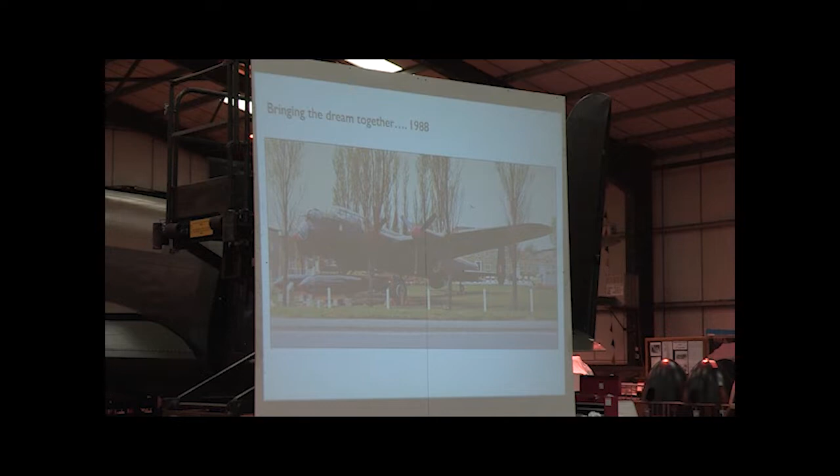So this is the Lancaster stood at RAF Scampton, 1988. We were actually offered the Lancaster in 1982 - Lord Lilford rang up Fred and said, it's about time I sold you that Lancaster. So they managed to agree a price. Fred went to see the bank manager - I'm sure the bank manager rolled his eyes. They managed to buy the aircraft, but they had to arrange moving it here to RAF East Kirkby as was.

They put the hangar up and brought the Lancaster here. It actually moved here in 1987, 1988, early 1988. The aircraft itself hadn't really been in a hangar until it came here, so it had been stood outside for the majority of its life.

We were quite fortunate in that before the RAF put the aircraft out on the gate at RAF Scampton, they did quite a major overhaul of her. They did a complete paint strip, took her apart, inhibited her, put her back together again, painted her and put her out on the gate. They used a reddy brown spray that we refer to as oxblood, which is a very strong preservative - we'll come back to that a little bit later on.

So the aircraft stood there at RAF Scampton. I'm sure a lot of you will have seen it if you drove past. At that point, the RAF didn't actually want Fred and Harold to move the aircraft and bring it here to East Kirkby, so they made various offers of how they would keep it at RAF Scampton and what they would do to her. But Fred and Harold had it set that they were going to bring her here.

On the balcony of the control tower, they stood there one day and said, if we can get that Lancaster here, there'll be nothing else like it in the world. And I think they were right - I don't think there is really anything else like the aviation centre here. It's very unique seeing an original wartime Lancaster on the original wartime airfield where they served.

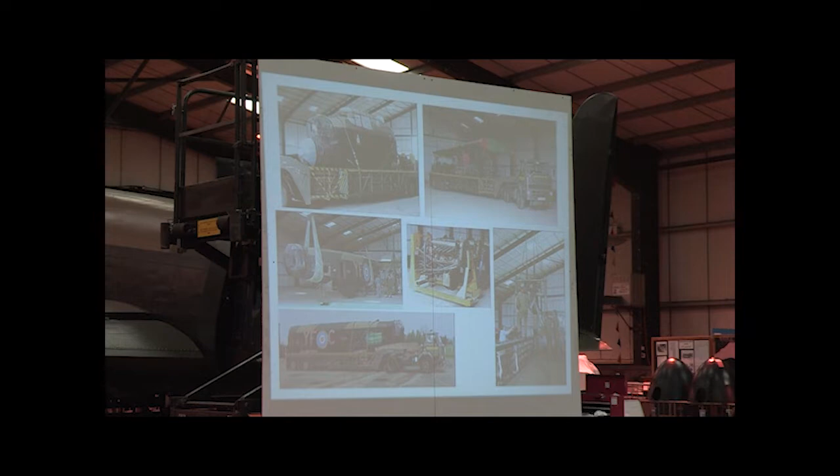So actually moving the aircraft, we spoke to the RAF and they were very willing to help us move the aircraft. They actually sent 11 men to take the aircraft apart. The group of men were called Crash and Smash - it's actually a part of the RAF that goes over and takes apart wrecked aircraft and rescues them, bringing them back to RAF stations. I'm not sure Crash and Smash is the official term, I think it's just the nickname they were given. They weren't too bad with this aircraft though, they were quite kind in the way they took it apart.

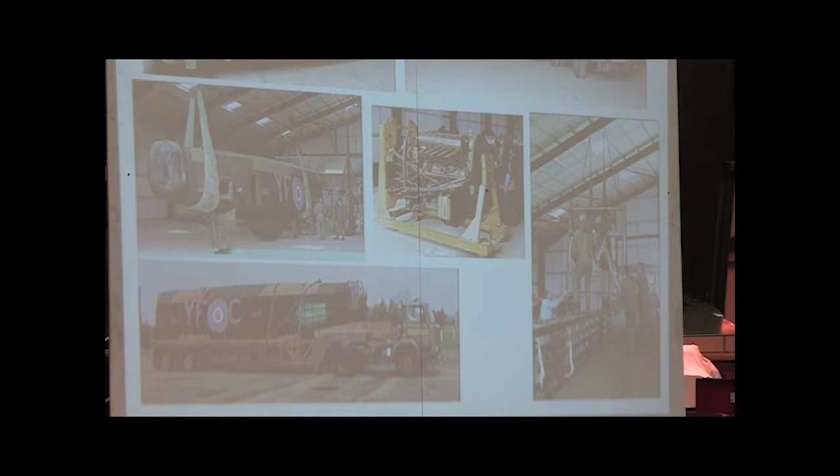It actually took 7 Queen Mary loads - this is a Queen Mary, the trailer itself - to bring her here to East Kirkby. It took 11 men 14 weeks to take her apart, bring her here, and put her back together again.

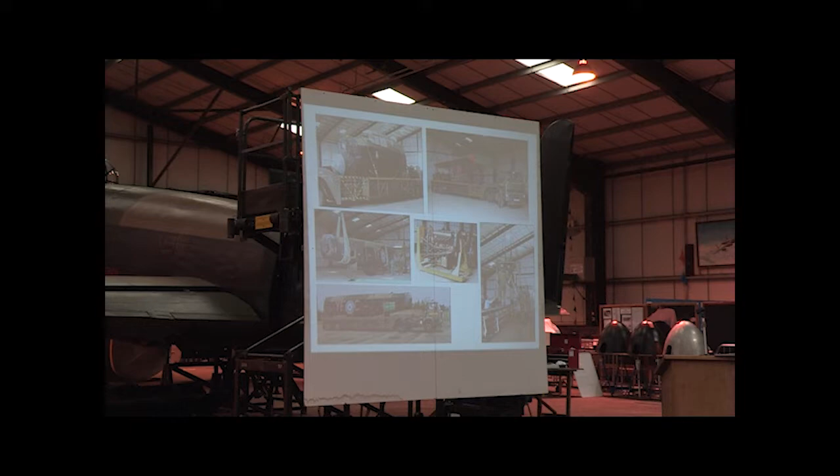So here she is, the majority of her brought into the hangar. If you look at this photo at the bottom, this is on that half of the hangar base. When we originally put the hangar up in the 80s, we only put half of it up - where you can see the double stanchion, we only had the first half, which was sufficient to keep the aircraft in. It was only in about 2000 when we put the other half of the hangar up.

So she was brought over by the RAF and put back together again. This is her in the hangar - you can see she's in her major sections, as the Lancaster is sectional. She basically unbolts and then bolts back together again, and that was originally from production. They had many production sites around the country where different sections of the aircraft were built, then brought together on trailers, assembled, and then flown off to the airfield where they would be sited.

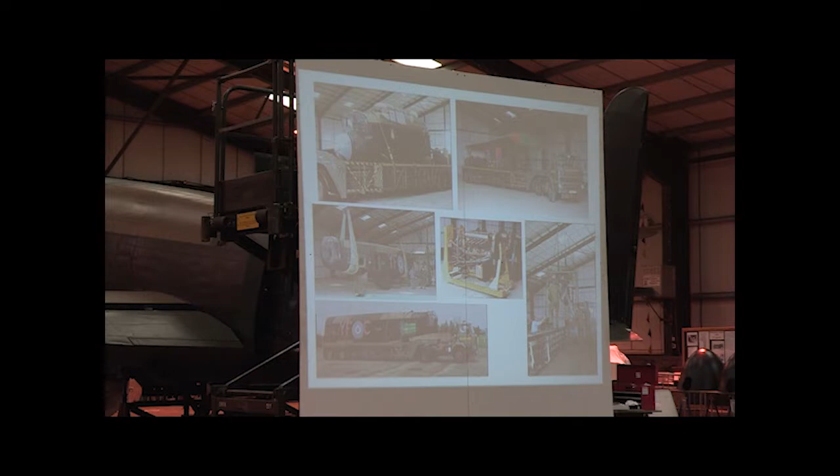Another photo of the aircraft coming together - you can see she's being craned together and bolted together, not in a too dissimilar configuration to how she is now.

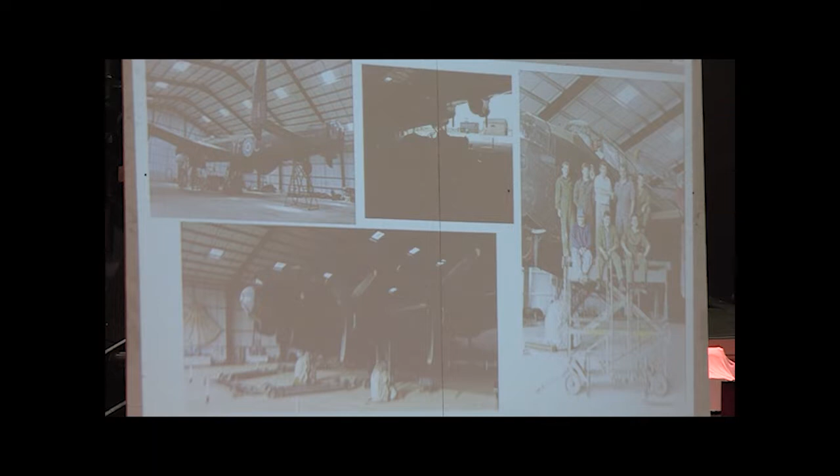Then the aircraft was finally completed, and we see here some of the crew members who completed the aircraft, and a gentleman called Keith Coldren, who at that time was looking after the site for us, while Fred and Harold looked after the poultry.

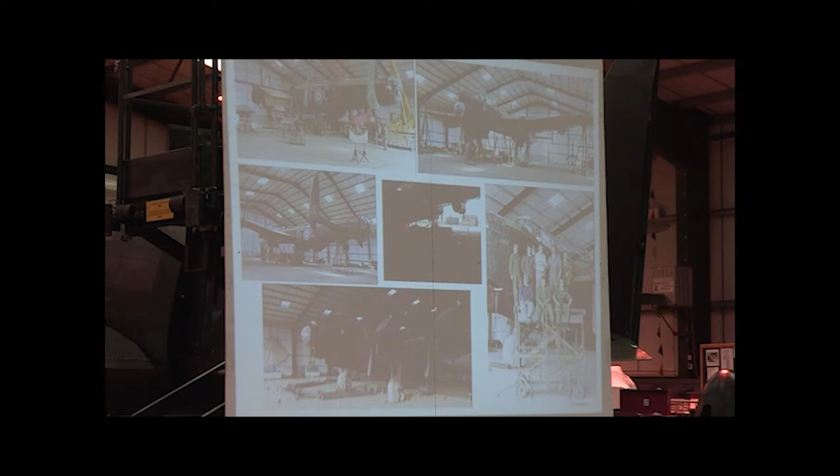At this point, the original plan was we were just going to keep the aircraft in the hangar and come have a look at it when we wanted, as you do. So we had put the hangar up, brought the aircraft in, and thought high days and holidays, if anybody came round to see the family, we could bring them over and let them have a look at the Lancaster.

And really take it in - but people said, you can't do that, you can't just lock the aircraft away. You've got to let people see it, because people have got to experience it and appreciate it for what it is.

So it was decided then that yes, we'd open it up to the public, to come and have a look. We didn't know how that was going to go, of course - didn't know if anybody would actually come and look at it. It was quite a major step to invest all this money in purchasing the aircraft, bringing it here, putting it in the hangar, putting the hangar up, and then deciding to open it up to the public to see if anybody actually wanted to come and have a look.

Fred had quite a few comments about this operation, spending all this money, bringing it here, investing in this work. The bank manager said to him, well, you've done it, Fred, and you've still got your health. And somebody else said to him, well, you've done it, Fred, and you've still got your wife, which they were more surprised about.

During the war, East Kirkby was one of over 40 Bomber Command air bases in Lincolnshire. The Panton brothers preserved the aerodrome as a home for their prized possession, a 1945 Avro Lancaster.

Well, we did live here as lads during the war, during the blackout, of course, and we can remember the Lancasters taking off and going on bombing raids and coming back early mornings. It's always a strange feeling to me to come out the house when it was pitch black and see the runway with a flare path lit up. That's the relevance of this Lancaster being here today, I suppose.

We feel so proud of those men, what they were doing 50 years ago, because we saw it with our own eyes. And as I keep repeating myself, you cannot speak highly enough of those chaps, because they would have gone for those bombing raids even if they knew they weren't going to come back. In fact, half of the young men in Bomber Command didn't come back from operations.

Fred and Harold's brother, Chris, was amongst them. If it wasn't for my brother Chris, none of this would have happened today. He got lost on the worst raid during the war, the Nuremberg raid on the 30th and 31st of March 1944. It was his last operation. When we look at this aircraft, we think of someone. That's what it's all about.

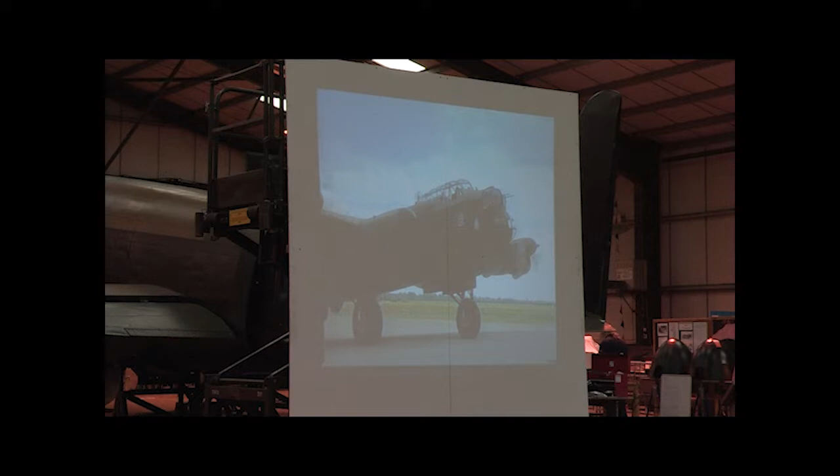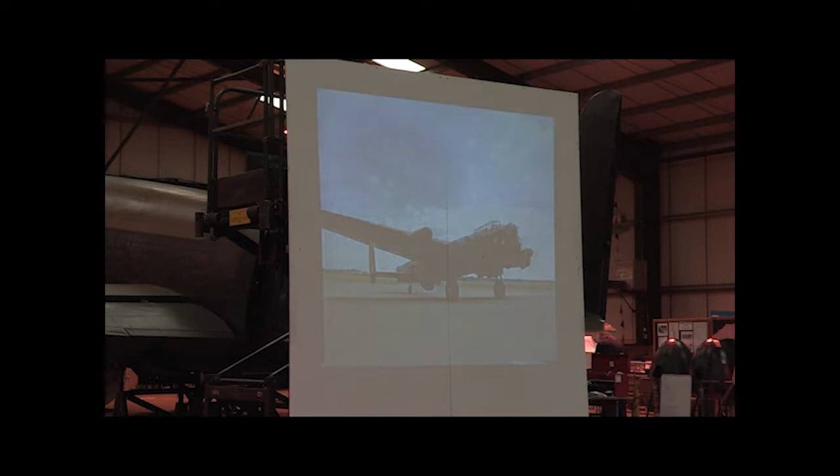So here we have it, the aircraft completed. Fred and Harold sat on the David Brown tractor and just towed her out of the hangar. You'll see on the side of the aircraft we've had LEC painted on, that's the 630 Squadron who were based here at East Kirkby during the Second World War. The opposite side had DXC, which was the 57 Squadron also based here.

So obviously the aircraft was complete, stood out in the hangar here at East Kirkby. Fred and Harold seem to have had many questions posed to them over the time, and they seem to come in sections. The first question was, are you going to let people come see it? The second question was, are you going to get it running? And the third question was, when are you going to fly it? So we're at the second question point this time, are you going to get it running?

So Fred and Harold toyed with the idea. They thought, well, we could give it a bit of a go, I guess, see if the engines will run. At this point, the Lancaster hadn't been running for 23 years. She had been well preserved, stood at RAF Scampton, and the engines had all been sprayed and inhibited with this oxblood that I've spoken about.

So quite fortuitously, not too long after this time, there was a gentleman called Ian Hickling who came and saw Fred and said, do you want me to get the Lancaster running for you? Ian at that time was late 20s, early 30s, and as you can imagine, Fred said, well, I don't think you can do it. But Fred rang up Barry Sears, who was the warrant officer of the Battle of Britain Memorial Flight at RAF Coningsby, because Ian claimed he'd worked for 8 years on the BBMF.

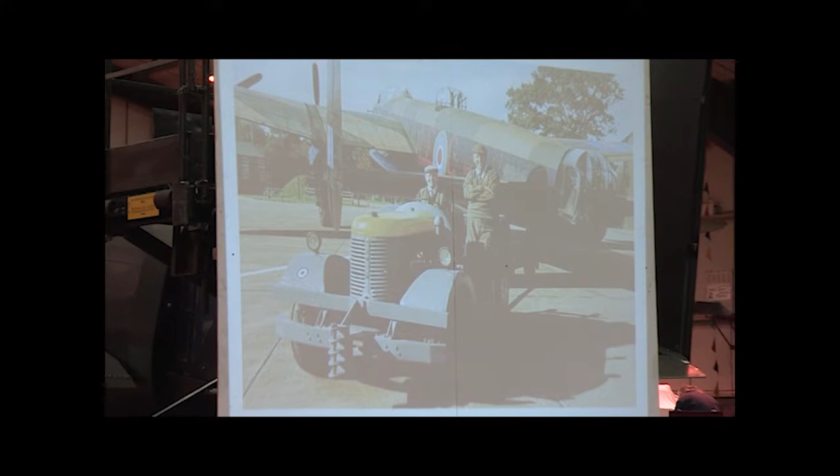They just used the inboards to start. Once they'd done their taxi test, they thought, well, this is viable, we could actually taxi the Lancaster, and they worked on getting the outboards running as well, the two outboard engines. All the engines were really running within about a 6-month period, so it's quite a short period to getting the aircraft live again.

So we'll move on to the next little video that I have.

Responsibility for taxiing such a unique aircraft had to be undertaken by an experienced Lancaster pilot. There was only one man for the job.

The idea of actually operating two Lancasters is obviously fantastic. I feel very honoured to be able to operate one, but to actually operate two and within such a short distance. This one, I would say, is even more important to me in that it's such a family connection, in that my father used to operate and fly Lancasters from here 50 years ago, and to be able to do the same with another Lancaster at the same airfield, just 50 years later, is a thing that nobody would ever have dreamt of, I imagine.

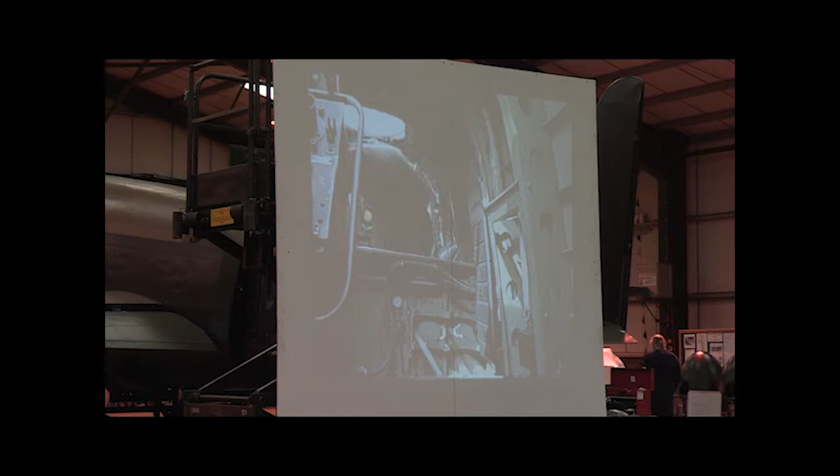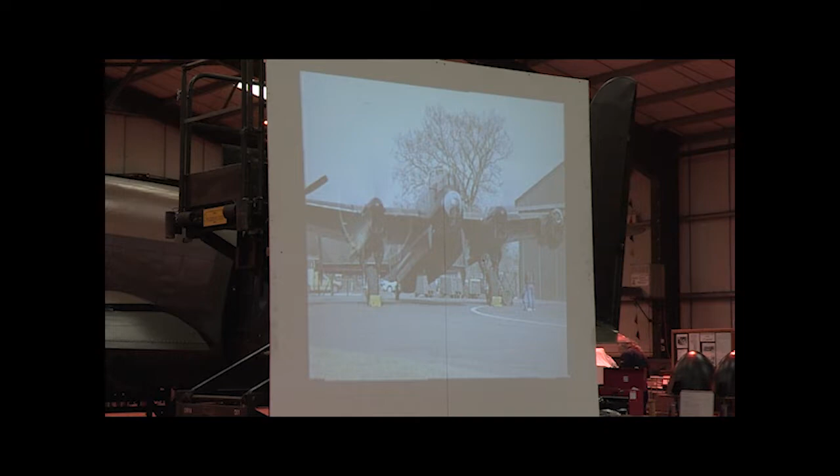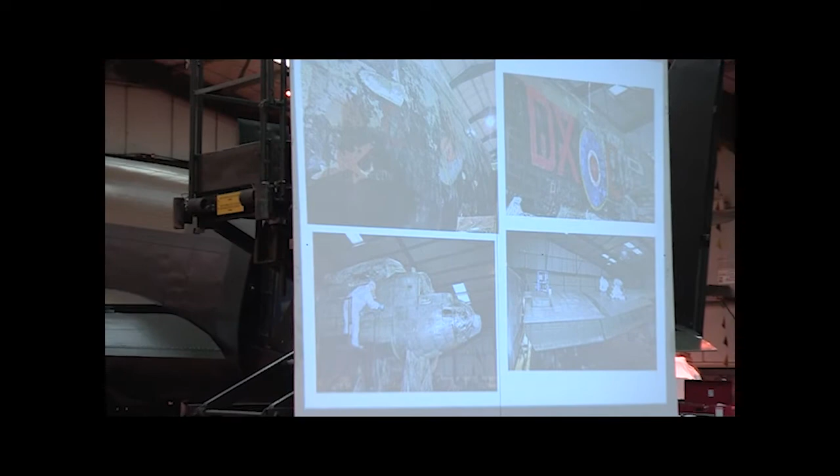It's quite a long story, this one, but we got some quotes for paint stripping the aircraft and repainting her, which gives us a chance to actually survey the aircraft - the skins, all the rivets and things like that. We got a quote and it was coming in at £125,000 to paint strip and repaint the aircraft.

We were quite fortunate in the fact that we have a gold member of the centre called Armand Lloyd. Armand works in a business down in London, but he's also interested, obviously, in Lancasters, and he wanted to try and help us in any way he can.

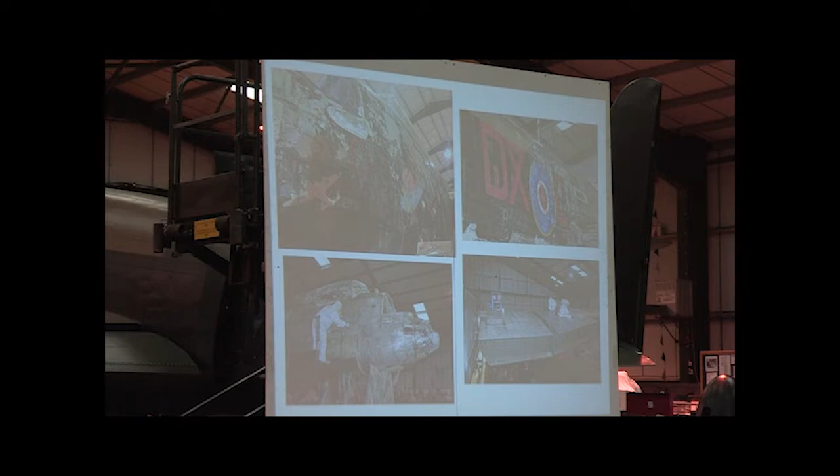He saw on eBay there was a large box of gauges and instruments for a Lancaster that were up for sale. He contacted us and said, 'Do you want me to buy them for you? Are they any good to you?' To which we said, 'Yeah, by all means, please do.' So he bought them - they're actually over in Ireland. He bought them and had them posted, and that caused quite a lot of issues because gauges and instruments are radioluminescent, so they've got radioactive paint. All the alarms went off when they came through the postal system. The box had to be completely taken apart, everything wrapped in lead, reboxed and sent back. Eventually they were delivered here to East Kirkby.

Through all the conversations that Armand had with the seller of these items, the seller asked him what on earth he wanted them for - what was he going to do with them? To which Armand told him, of course, they were coming here to the Lancaster here at East Kirkby.

And it turned out that the person who was selling them, his father flew Lancasters, I think it was 518 Squadron, during the Second World War. He was an Irishman, and it turns out, as coincidence have it, that he ran a huge aircraft painting company called Mass Aviation, MAAS, based out in Holland, in Alabama in America, and in Ireland as well.

This gentleman called Tim said, is there anything I can do to help? And we said, well, as coincidence has it, we've just had a quote for repainting a Lancaster. How do you fancy doing it? So he says, yeah, we'll organise to come and paint strip and repaint your Lancaster for as cheap as we possibly can. So in the winter of 2016, it took about 2 years to arrange actually how we're going to do it and facilitating doing it.

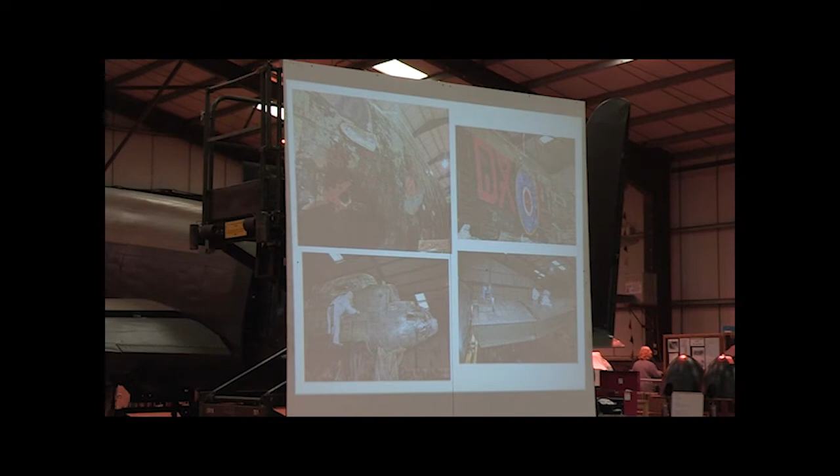The winter of 2016, they sent a team of 8 gentlemen, all of different nationalities, Polish, Irish, British, Lithuanian, all sorts of different nationalities, brought them over from Holland with all the associated gubbins that they required to paint strip the Lancaster. We got a couple of different sponsors on board. One of them was Akzo Nobel for the paint, and another one was a scaffolding company to scaffold it all around the aircraft, ready for paint stripping her.

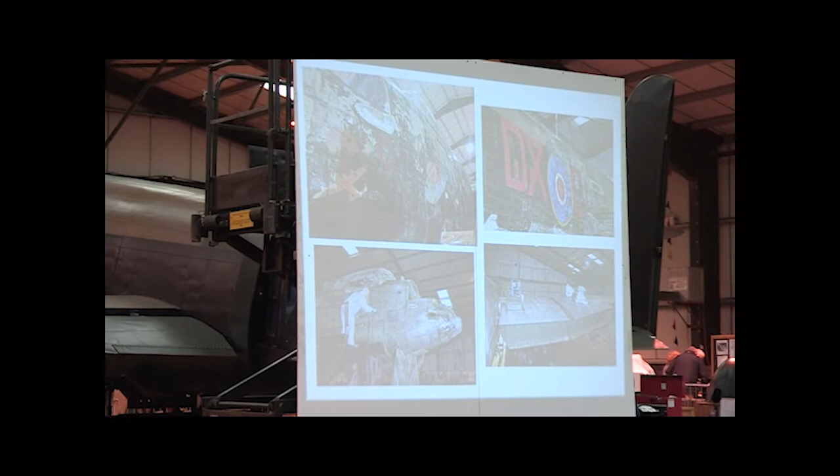We found that there were about 4 or 5 layers of paint, either black and camouflage, and about 8 to 10 layers on the roundels. So you can imagine I know some fairly good foreign swear words now.

The aircraft was completely paint stripped down, and when the Lancaster was brought here to East Kirkby, it had the squadron codes of YFC, which was the station flight at RAF Scampton. And we never paint stripped the aircraft before this position we're talking here, so it had always been painted over the top of. So when we put the DXC onto the aircraft, we just painted over the YFC, and when we then moved on to the DXF and the LEH, we just painted over again. So there's lots of layers of paint on there.

I suspect if you were RAF Scampton and you were in Jankers or you'd done something wrong as an RAF serviceman, the punishment was to go and paint the roundel on the Lancaster. And I think by the judgment of how much paint was on there, there's a lot of dodgy airmen at Scampton at the time, because there was an awful lot of work to try and get the paint off those roundels. So they eventually got to it, got all the paint off.

We allowed originally 2 weeks to take the aircraft apart before the paint strip. The plan was to take the turrets off, take the bomb doors off, the undercarriage doors, the elevators, the rudders, everything was to come off to leave a bare aircraft so that items could be paint stripped on the floor and the aircraft could be paint stripped in situ. We allowed 2 weeks for that.

It actually only took us about a week, so we were a week ahead of schedule. They came in, paint stripped the aircraft, and it took them 12 days to paint strip the aircraft, so they allowed a week. So we lost that week straight away that we'd originally gained.

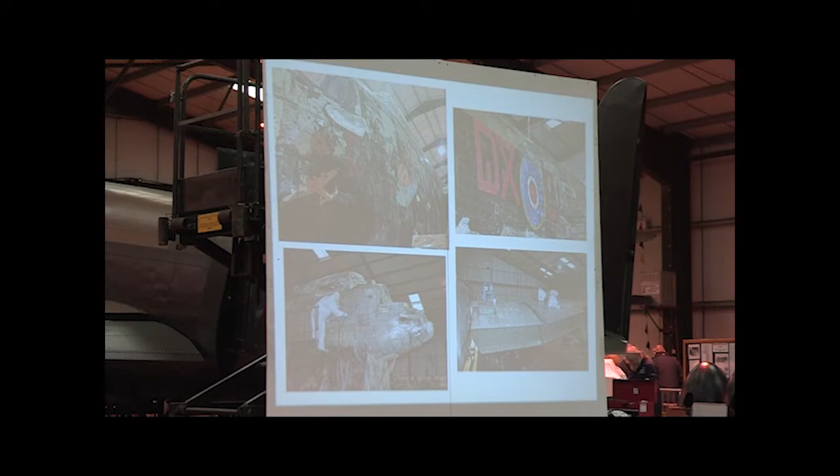The chemical paint stripper was, shall we say, it was good for the first coat, no good for the second coat, but very good on the third coat. So they had a lot of problems actually applying the stripper to get the paint off. It's sprayed on, you allow it to work, it effectively lifts a layer of paint and then you scrape it off. So it's a very manual, labour-intensive job. I said they sent 8 men and it took 12 days.

So once the aircraft was completely paint stripped, it's then washed off with a soapy fluid, a soapy water-based liquid, which actually takes the acidity out of the paint stripper and neutralises it. So it's all washed down, and then from that point we got the aircraft back to survey her and to work on her to do the work that we thought would be required.

So this is the aircraft in a cleaned down state. One of the main jobs we had, we found quite a lot of surface corrosion on her.

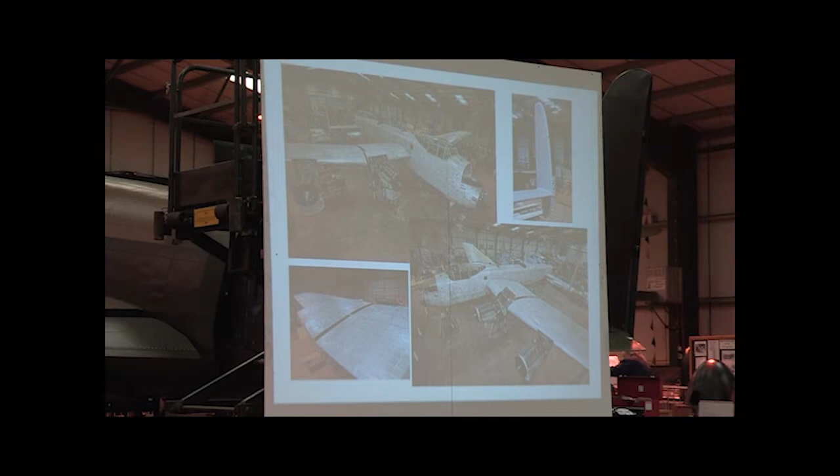That had to be removed using little rubber wheels with little rubber fingers on it, and that just agitates the surface and removes the surface corrosion. So we had the entire Lancaster to run over with that to clean any surface corrosion off.

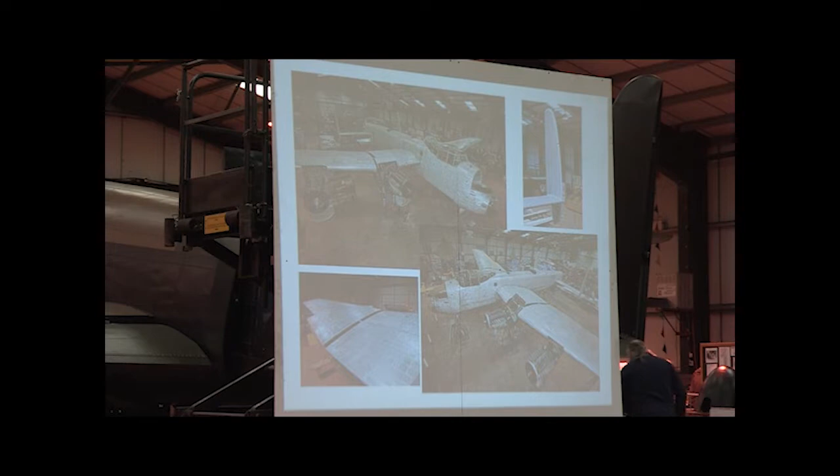Where we actually found to be the worst area was underneath the wings and on top of the wings, where the original black paint had been when the aircraft was painted white. So we don't know whether that black paint attracted moisture and locked it in, causing corrosion, or if it's something to do with the exhaust gases going over and under the wings, which affected the aluminium. So there was quite a lot of work removing corrosion there, many man hours to actually do that.

One of the main jobs we wanted to do while the aircraft was in this state, other than the survey, was to replace a lot of anchor nut strip. There's a lot of panels on the aircraft which are held on by steel anchor nuts and also by rows of rivets.

Something that's called up in the modern paperwork for looking after a Lancaster is to remove a set of panels that hold the trailing edge to the wing. Those were originally all held on by rivets. So in order to facilitate these panels coming on and off very regularly, we'd have to replace all those rivets with screws using anchor nuts.

So those anchor nut strips had to be specially produced. They cost £12,000 for all the anchor nut strip, and they took a lot of that winter period actually putting those anchor nut strips in. So that's just one piece of work that no one will ever see again. We know it's happened, and we've certainly paid for it.

So that's a survey of the aircraft, and some airframe work replacing skins that were too badly corroded, was the majority of what happened during that winter period.

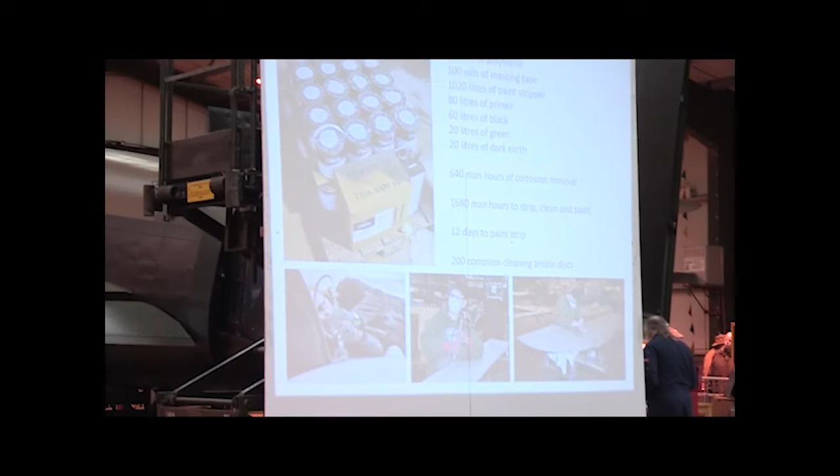A few figures here. During the paint strip and repaint, we used 2,000 metres of polythene, 100 rolls of masking tape, 1,020 litres of paint stripper, and then for the repaint there was 80 litres of primer, 60 litres of black paint, 20 litres of green paint, and 20 litres of dark earth.

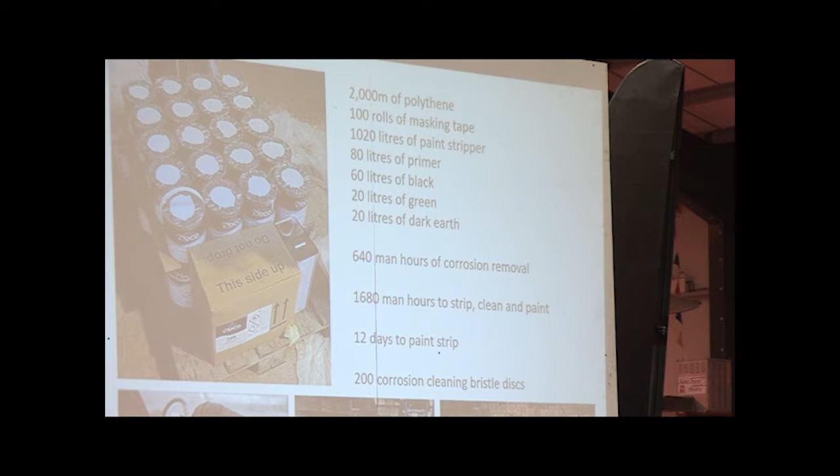There was 640 man-hours of corrosion removal, and down the bottom here you see this is what they're doing. This is Liz, this is Gary, and they've got these little wheels on the end of windies, of polishing guns, just agitating the skin, removing any corrosion until you get down to the good material underneath.

There was 1,680 man-hours to strip, clean and repaint. It took 12 days to paint strip, and we used 200 of those corrosion removal discs and a lot of elbow grease. So one of the problems we had, this is some paint here that was used on the aircraft.

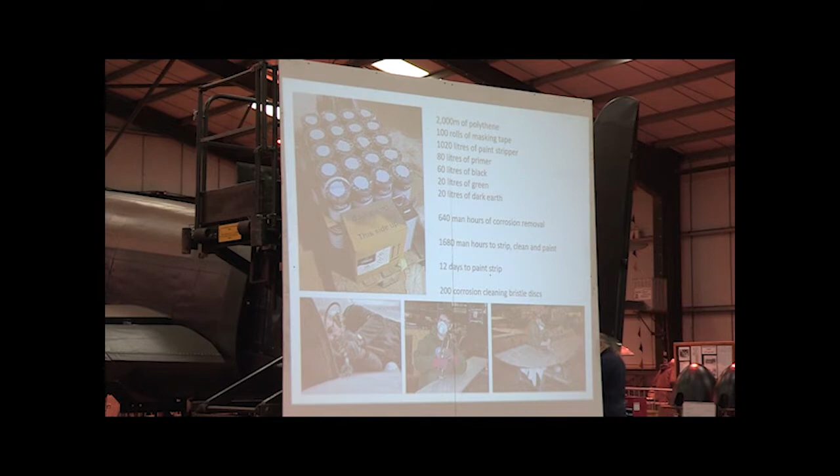The paint sponsor was Akzo Nobel, as I said earlier. We told them the square area of the aircraft, and they worked out how much paint we would need. Unfortunately, there was only about 25% of what we needed. So when the paint team turned up with 8 men willing to put the paint on the aircraft, we were slightly short.

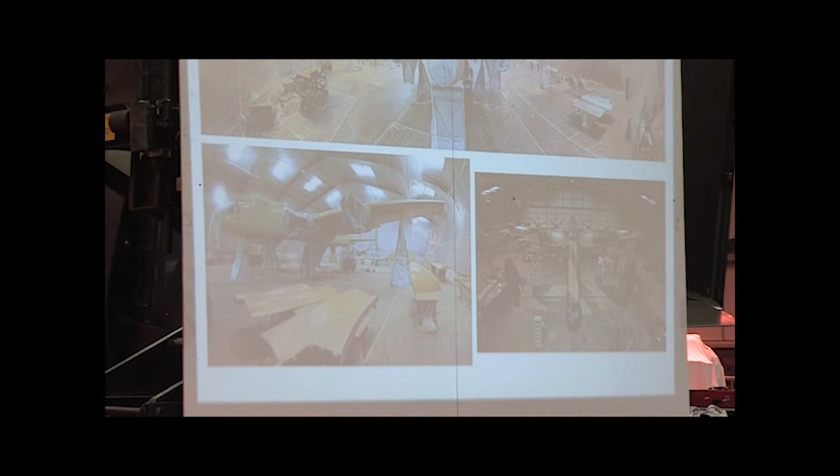When it came to actually opening up the paint that was supplied, there was only about a quarter of what we needed, and it was also matte. Matte paint was no good for the application we needed. We wanted it about 20% satin rather than matte, so it's a lot harder wearing, and it doesn't scuff and damage quite as easily.

So that caused a huge problem because we were at the end of our winter period basically. The last thing to do was to paint the aircraft, and then you could engine test to roll her out for taxi runs.

With the lack of paint, bearing in mind there's a 6-week lead time on ordering aircraft paint, we contacted the company that originally supplied it, and they couldn't make it for at least 6 weeks. It was probably going to be closer to 10, which would have meant we'd have lost about 3 weeks of the first taxi runs of the season.

So it was a no-go for us, we couldn't do it. We approached another company, a paint company that does paint for aircraft, and again they were looking at a 6-week lead time, but they might be able to get us some matte paint a little bit quicker if we wanted any of that.

So we had quite a few calls between us, conference calls, if I was at home and got a call or anything like that, talking between us all, deciding what was the next process, what we were going to do.

One of the ideas we flirted with was painting her completely white, like she would have been when she was out in the Pacific. We could have painted her in the matte paint and then put a lacquer over the top, which would have made it a satin sheen. But then we decided that if we did that and the lacquer was scraped off, it would just leave matte paint underneath, so that was no good.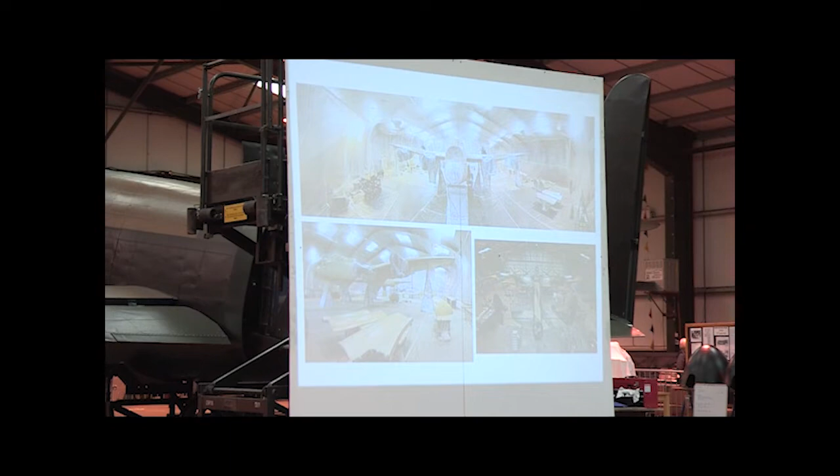So they came back from Holland, Denmark, wherever they were based, came in, cleaned the aircraft down again with a solvent cleaner, but scuffed the aircraft down, because once you've applied primer, you've only got a certain number of hours before you then put the top coat on top. If you don't meet that bracket of time, then you have to re-scuff the surface to have a good surface that the paint will etch to.

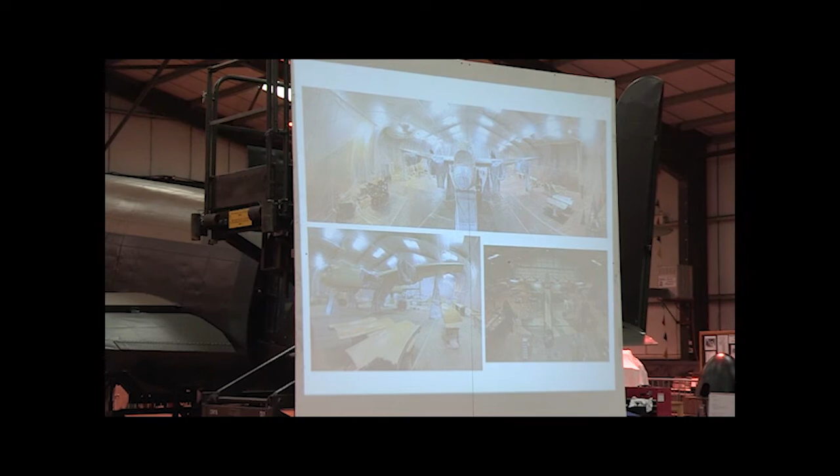So they repainted the aircraft, taking that amount of paint. The paint team went home, and we allowed the paint to dry before we started to take down all of the polythene around her and get a good look at what the aircraft was going to look like.

And she's here completely painted. You'll see here she's having the roundel and the letters painted on the side. This is some of the paint team, bottom left here. We gave them a free t-shirt, as you do. Thanks very much.

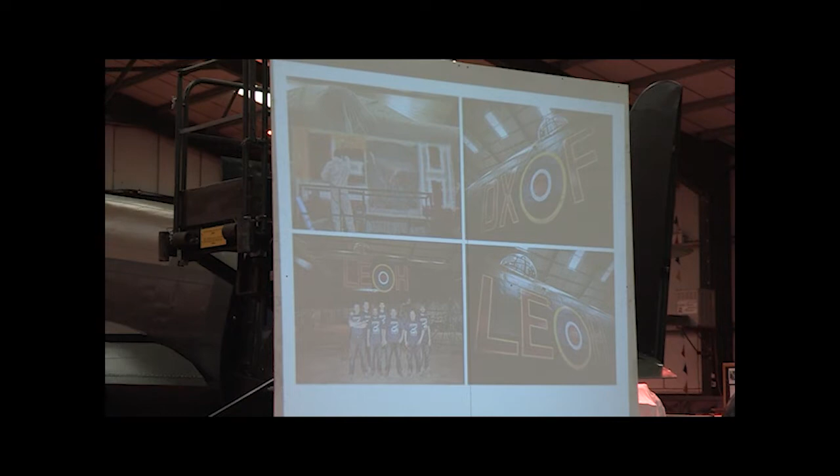So that's painting on all the roundels and the artwork. And then on the nose, we had a gentleman called Duncan Parker from Nottingham who came and painted the nose art for us. Now this nose art is slightly different to what was taken off, in the fact that we decided we would depict Chris's operations on the nose. So that's all of Chris's operations he did during wartime on Halifaxes.

So the yellow ones are nighttime ops. The ice creams there are Italian operations. The swastika is for shooting down enemy aircraft. The red one is for a Berlin operation, and the key is for the 21st operation.

Duncan put his own slant on the nose art of Just Jane. You'll see it looks slightly different to what came off. He's had a little bit more depth to it and things, and every artist, of course, has their own take on what they're going to do. So that's how she rolled out in the spring of 2017.

The original quote to paint, strip and repaint the aircraft from another company was £125,000. Using MAAS Aviation enabled us to do it all for £20,000, an absolute snip of what it was originally going to cost.

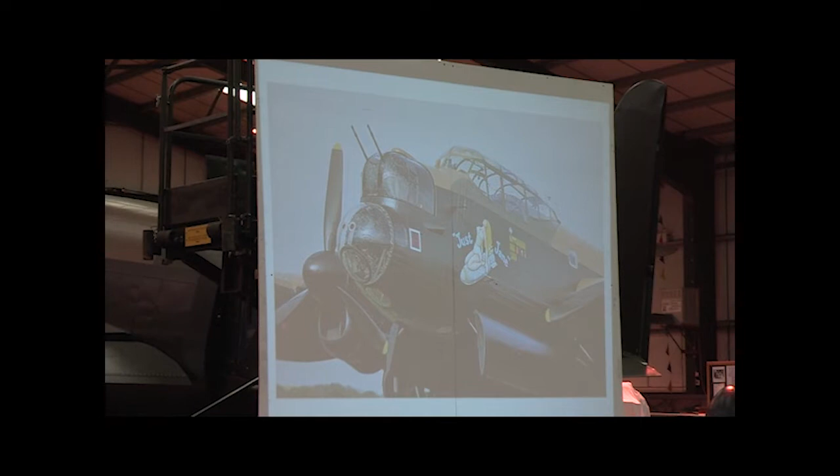The benefit of doing all that was we did a survey of the aircraft. We knew what we needed to do to then make her airworthy, or at least the majority of what we needed to do. From that point, we had to decide on a plan going forward on how we're going to do it.

We had to speak to the CAA and say, by the way, we want to restore our Lancaster to airworthy condition, what do you think? So we went down for a meeting with the CAA. They were very happy for us to do it, as long as we followed all the protocol and procedures required to restore an aircraft, whether it be a Lancaster, a Spitfire, a Hurricane, anything of that sort.

What we've come across with the Lancaster is because it weighs so much, it actually comes into a similar category to a 737 or 747 airliner. What's required of the CAA licensed company here is the same as whether you're restoring or working on an airliner. There are different companies within the CAA legislation licensing, and depending on what aircraft you work on dictates what sort of company you have to set up.

So for a Lancaster, you need an A823 company, which is for a heavier aircraft. Effectively, with the approval of the company, we could say we want to now work on a Boeing 747. Not that we get it in here, but we'd need to prove we could do it effectively - it's the same license and company approval required for a Lancaster as something a bit bigger and more modern.

So we started thinking, how are we going to actually do the work? What's the best thing to start on? What's the best part of the aircraft, or what needs to work first?

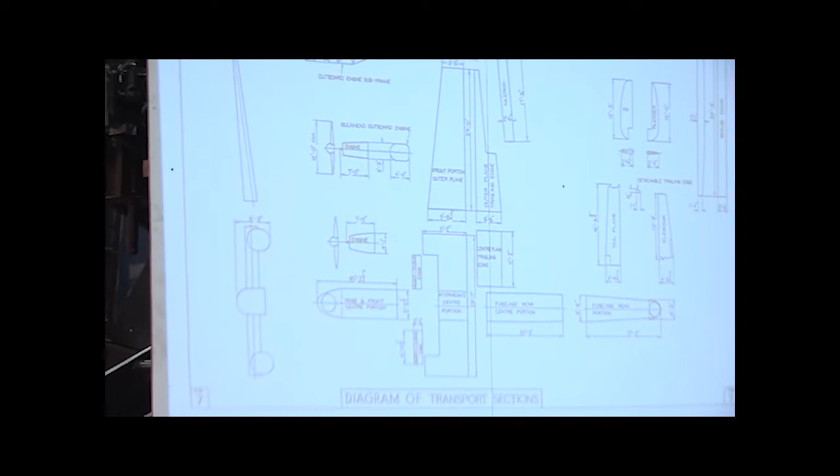So what's the plan? A Lancaster is a sectional aircraft. As you can see here, if you can decipher this plan, this is out of the AP 2062, which is basically the Bible on Lancasters - it's the manual for working on one, and it tells you everything about it.

A Lancaster is a sectional aircraft, built in sections, brought together, bolted together and flown. It has major sections: the cockpit, the centre section, the mid-section, the tail section, bomb doors, tail fin, rudder, elevator, tailplane, and then the trailing edges, the wingtip, plus the engine bearers and subframes, and the engine nacelles.

So we thought, working from this, we'll break the aircraft down into major sections and work on a section at a time. The biggest problem we have here at East Kirkby is, to pay for the restoration, we have to taxi the aircraft. So we have 6 months of taxiing, raising funds, and 6 months of actually doing the work. Everything has to be taken down to bite-sized pieces to eventually end up with a completely restored aircraft.

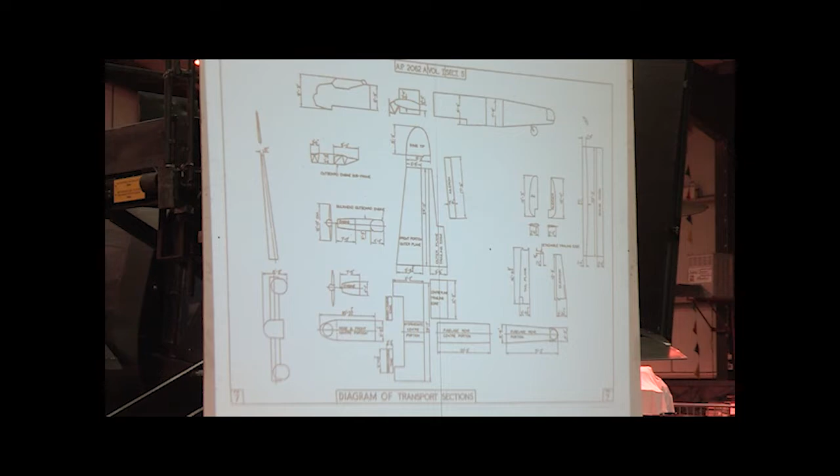That posed quite a head scratcher to the CAA, because they're used to an aircraft coming offline, being taken apart, restored, put together again, and flown and finished. Whereas we turned around and said, oh no, we don't want to do it like that - that's too easy. What we want to do is take a bit off, restore it, put it back on. And they said, well, you're taking a bit off, making it airworthy, and as soon as you bolt it back onto a non-airworthy aircraft, it's no longer airworthy. So there's been quite a head scratch as to how we're actually going to do the paperwork around doing the job this way.

We've come up with a way of doing it, and in fact we've got another CAA inspection at the end of this month, inspecting the site and the work that we're doing. But at the moment, people seem happy with how it's progressing and how we're actually going to do it.

The way we've decided to do this work, doing it sectionally each winter, means that everything comes together in the final year, which I'll talk about in a minute. Effectively, when it's off the aircraft it's airworthy, when it's put on it's not, but everything will then be airworthy by the final year. With the CAA's agreement, in the final year we'll do what the Battle of Britain Memorial Flight Lancaster does, a major overhaul, where everything is inspected and signed off.

So we'll take the item off, say the fin, take it off, bust it down, restore it, put it back together again, and put it on the aircraft with all of the current paperwork signed off. Then in the final year, we open it up with the inspection panels, look at it and say yes, it's still airworthy, and sign it off. That final document is the airworthiness of the aircraft.

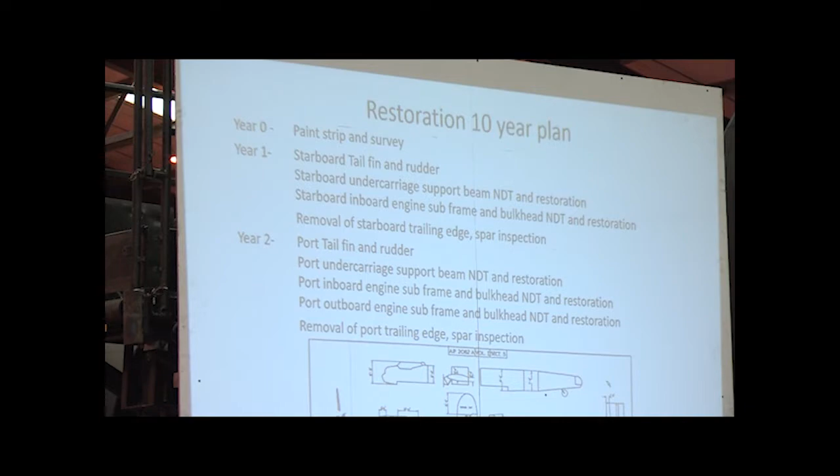So we've made the plan as to what year we're going to do what section. Year 0 was the paint strip and survey, the basis of the work going ahead. Year 1, last year, was the starboard tail fin and rudder, on the starboard side of the aircraft. The starboard undercarriage came off, and the undercarriage support beams were NDT'd and checked.

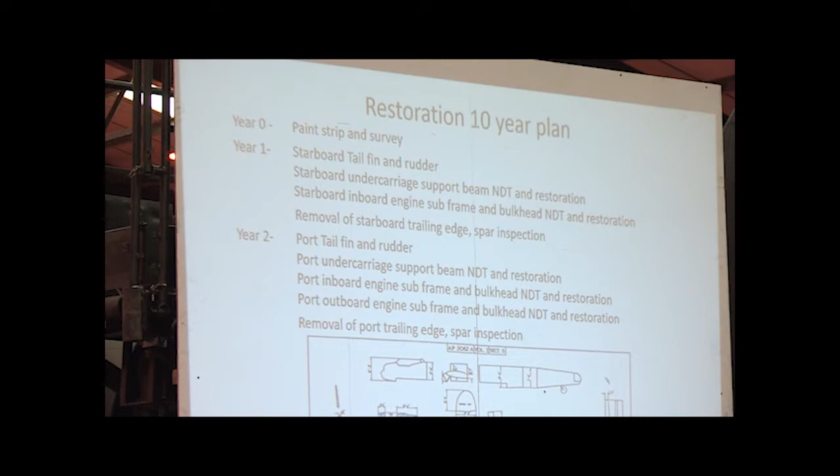The undercarriage support beams are really large cast or forged items that hold the undercarriage. They're also the pickup points for the engines, and they bolt back to the main spar, so they're kind of integral to the strength of the aircraft itself. On the starboard side, in year 1, they came off, were NDT'd and went back on as airworthy items, or sufficient for airworthy. The subframe for the engine bearers and the bulkhead also came off for inspection.

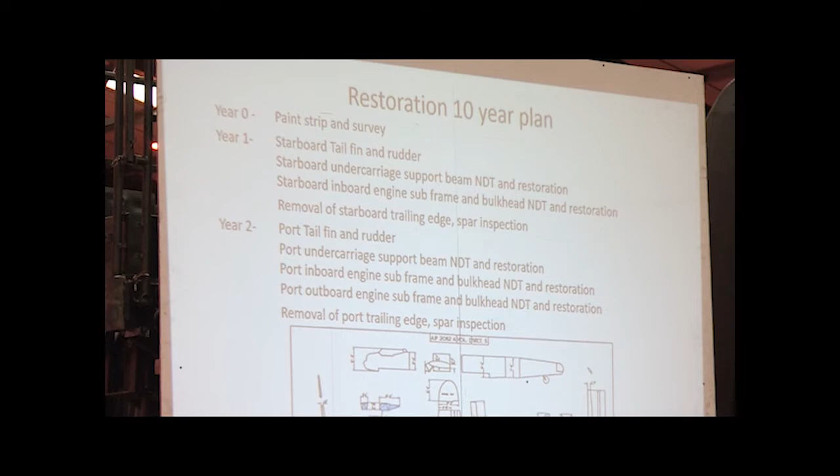And then there was removal of the starboard trailing edge. The trailing edge basically bolts onto the back of the wing, this section here, so removing it allowed us to inspect the web of the rear spar.

The first two years, and we're in year 2 now, are basically identical except on opposite sides of the aircraft. So what we learned from doing the starboard side, and the parts we had to produce for that, we've also been able to produce for the port side, ready for the work currently underway there, although it's all in a box at the moment, so you can't really see it.

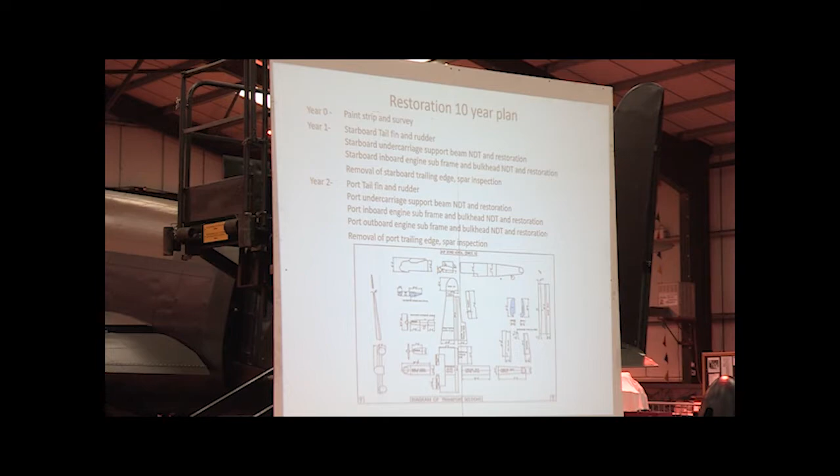Year 3 is the rear fuselage, so we're looking at the transport joint where the H2S is, the blister underneath the aircraft, that point rearwards.

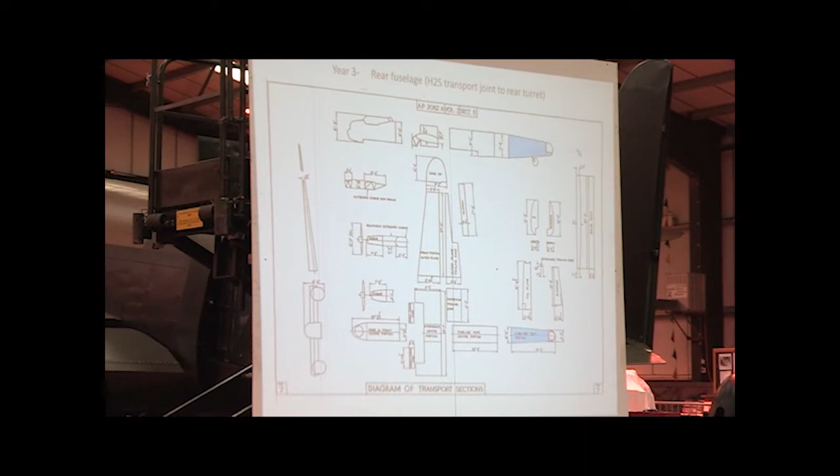What we'll have to do is jack the aircraft up. The centre section, the main wing section, is jacked up. The rear section is then craned up onto a high trestle, with a trestle put in just forward of the H2S, and then the rear fuselage section is pulled away on wheels and lowered down.

What we found with this aircraft, probably the biggest job, is that it was built with mag alloy rivets, which tend to degrade over time. So we've decided to replace every rivet on the aircraft with Hiduminium modern rivets. That's going to mean the life of this aircraft extends exponentially, it's going to be good for decades to come. We thought we'd do the job once and do it now rather than come back in 20 years' time and do it again.

So the biggest job, other than bringing the aircraft part onto a jig to make sure it doesn't move, is to drill out all of the rivets and place new rivets in. The top of the rear fuselage has extremely long skins, about 15 feet, 11 to 15 feet on the top.

We're going to try and keep as many of those as we can, because getting sheet aluminium of that length now is quite tricky. The skins on the sides are slightly shorter and done in thin sections, so we can't just do one skin at the front and move on. It's basically a skin that travels the majority of the length of the fuselage.

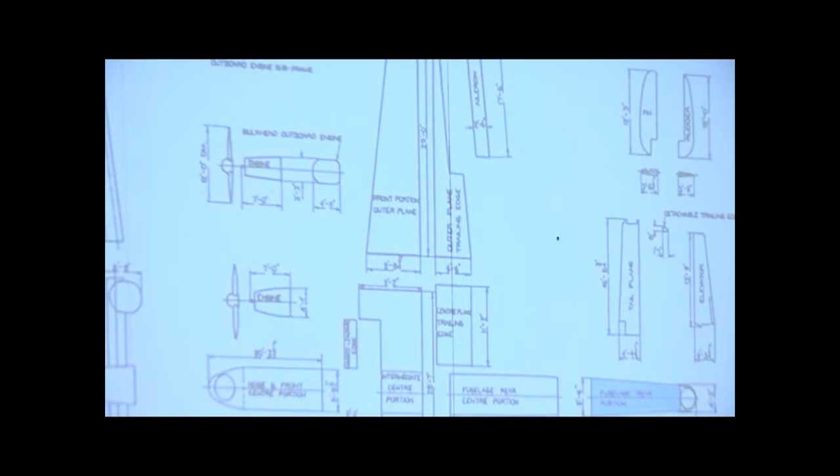So once the rear section is done, bolted back on, ready for taxiing in the May, and we go to year 4, which is the centre, the mid section, if you like, which is where the roundel and all the letters are on the aircraft.

Very similar process to the rear section. Of course, the mid upper turret's within that section. And what you'll eventually find if you come each year is the aircraft will progress further forward, and we'll be dotting around the aircraft each year, restoring different sections.

Year 5 is quite a big year. So this is the very nose section, the bomb aimer section. So that's where the bomb aimer kneels down, leans forward, and that's basically bolted onto the cockpit of the aircraft. So that's going to be coming off and being worked on.

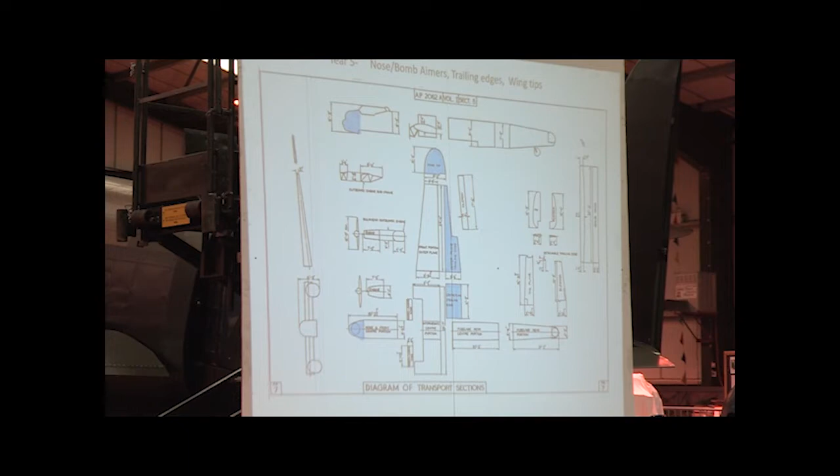Same process all the way through. The wingtips will also come off, trailing edges will come off. What we found in the trailing edges, like the one over there, that's the inner trailing edge off the port side, is the extrusion, so the angled sections on the trailing edges are quite corroded.

So there's something called dissimilar corrosion, particularly on this Lancaster, where steel meets aluminium, and they react with each other and cause corrosion on the aircraft. So on the extrusion here, there's a section of it where it's been mated with steel, which has corroded, so that's no good for airworthy.

So as time goes on, we've had to find an extrusion company. Extrusion is basically forcing metal through a die to make a particular shape. So we've got extrusions to make for the port tail fin, extrusions to make for the trailing edges, and also some stringers to make for the fuselage.

So a lot of work at the moment that we're putting in is actually making those contacts, finding those people that can do the work, who are very few and far between. So the hours now will actually save time in the future, because we just ring them up and say we need more of whatever extrusion. So it's quite a slow process now, but it'll actually speed up as we go along.

So the trailing edges need quite a bit of work for extrusion replacement. The wingtips, where it meets the wing itself, is another piece of extrusion, and the bottom extrusion on those wingtips needs replacing as well. So we've got to find or have a die made for that angle of extrusion, have it all bent and rolled to the right size. So there's quite a lot of work in the trailing edges and the wingtips.

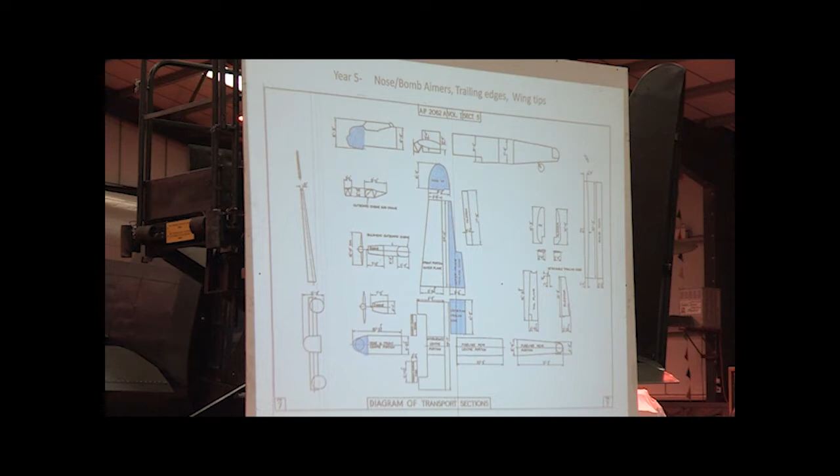But one thing we've found, which is a glorious piece of news, is that the rivets used in the trailing edges weren't mag alloy. It's about the only part of the aircraft that wasn't. Why they did, I don't know. So they possibly won't need completely re-riveting, but we have got to take the structure apart inside, clean it down, check it, and put it back together again.

Okay, year 6 is a huge job, and that's the cockpit. There's loads of wires, connections, hydraulics, pneumatics, all in the cockpit area. The control panel is a huge job on its own.

So the top of the canopy there, the front section is metal, the rear section is wood. That's all laminated wood. And of course, laminated wood over time delaminates. So we've got the wood to replace at the rear of the cockpit there. So that will be done. We'll have it made before the year actually comes to actually replacing it.

Yeah, but the cockpit's a huge job, particularly when you look up in the bomb bay of the aircraft and see all the different faces that currently have paint on them, and have got to be paint stripped, inspected and repainted. So I shall be at the back of the queue when it comes to finding out who's going to be paint stripping the bomb bay.

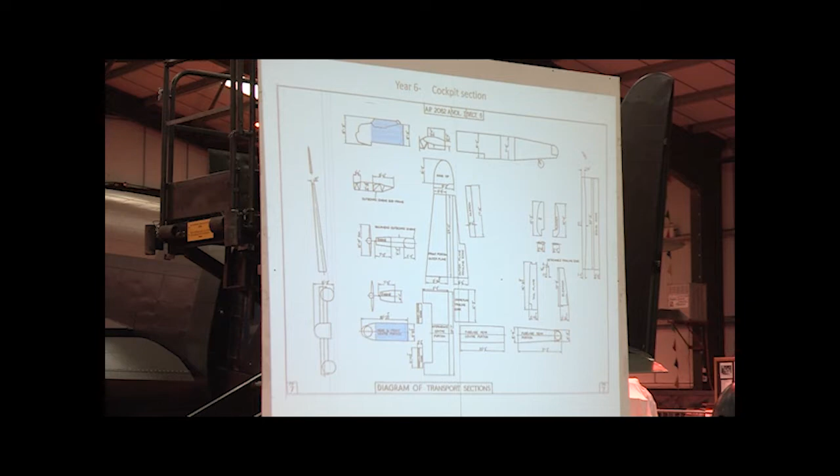What we found within the tailplane as well is when the aircraft was stood at RAF Scampton, the control locks weren't in all the time, which meant the rudders were allowed to flap around. That's also damaged some of the structure within the tailplane, tearing some of the formers because the control rods have been moving around beyond what they're allowed to.

So tailplanes will most likely be done away at somewhere like Arco, the Aircraft Restoration Company down at Duxford. And for elevators, we actually have a spare set which we may well restore in a summer period ready for the winter.

So as you can see as we go along, we're eventually getting to a majority of the aircraft being made airworthy. The next job is the wings. Now wings are going to be a hell of a job, terrible job.

They will go onto the jigs we borrowed from BBMF, and they will be completely de-riveted and re-riveted. One of the major flaws, I'll put my neck out there and call it a flaw, on a Lancaster is it uses plug rivets.

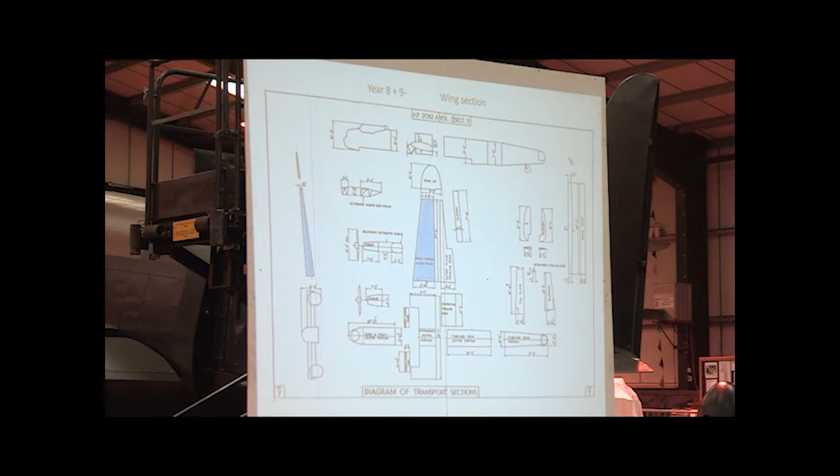Plug rivets are basically where the structure, or the spar shall we say, has a hole drilled in it that's bottomed out, so it doesn't go all the way through the spar, just part way in. It's then tapped with a thread, and then you beat a rivet into it until it expands into the threads, which stops it from coming out again.

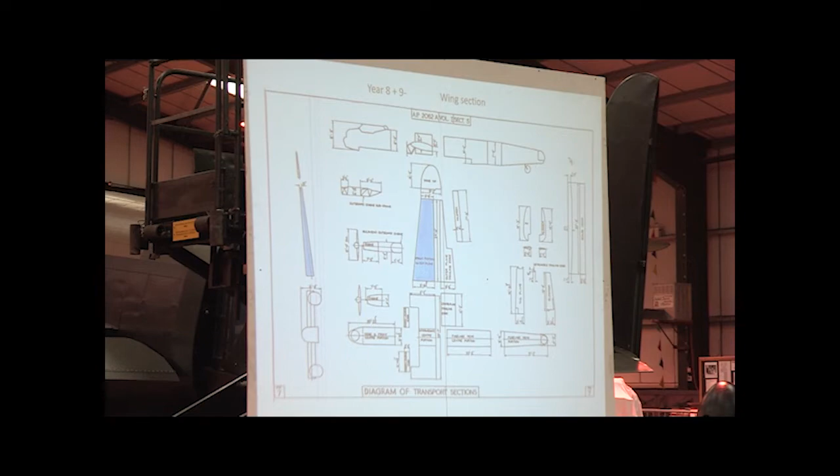I'm sure it was a good idea at the time, but now coming to it, it's going to be a real bugbear for us. We came across them on the port aileron and vowed never again. The forward skins on top of the wings are plug riveted to the spar.

The Canadians, when they built Mark 10 Lancasters, decided not to use plug rivets and just used screws instead - now that's a brilliant idea. So going back to ailerons, we've managed to find some Canadian ailerons which we can use the forged section out of, with machine screws in them.

At the moment we're in discussion as to what we're going to do on the main planes, with the use of either plug rivets or screws. So there may well be a modification to try and use screws as opposed to plug rivets.

So we're going to do one winter on the starboard wing, one winter on the port wing. They'll come off the aircraft, the engine will come off onto the jig, de-riveted, new skins where required, complete structure cleaned down, repainted, re-riveted, and of course all the fuel tank bays need work as well.

At the point when we take them apart, we will see into areas we currently cannot see. You can see quite a lot of the main spar sections and wing sections, the webs, from the fuel tank bays. There's 3 fuel tanks on each side, one on the centre section, and 2 in the main plane wing section. We've had those covers off and had a look inside the wing.

You can only see so far, of course, so we may get some nasty surprises when we actually start to de-skin the wing. We may find damage to spars, corrosion on spars, all sorts of things. So we're currently working out and facilitating the production of main spars if required.

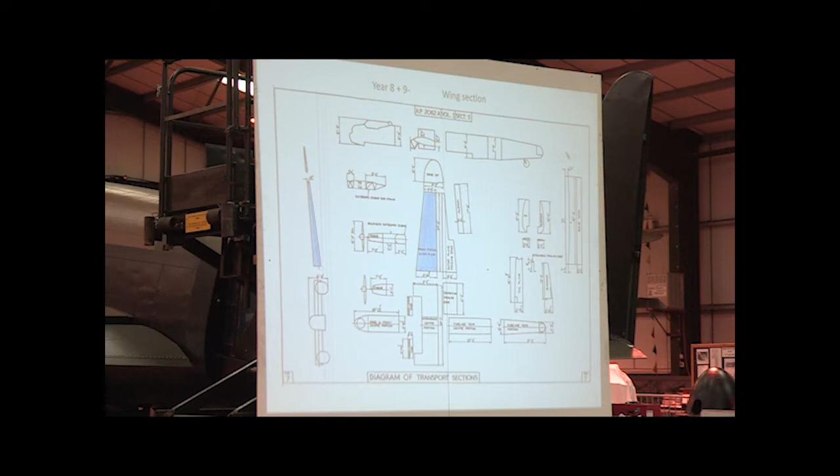The main spars on a Lancaster are actually lifed differently depending on which part of the spar it is. The lowest lifed spar on the aircraft is the bottom rear boom. The best way to explain it: the Lancaster's got 4 booms, making 2 spars, a top and a bottom at the front and the back, joined by a web, and they're all lifed at different hours.

The lifing was put on by British Aerospace, deemed to be the life taken from the Shackleton, basically. The Shackleton has a very similar spar to a Lancaster - I think it's the same extrusion with a slightly beefed up, stronger material.

So they looked at the Shackleton, and when the BBMF Lancaster became airworthy and was flying lots of hours, they decided they needed to work out the fatigue on this material, and set a fatigue meter on the BBMF Lancaster, dictating how many hours it's allowed to fly before the spar's replaced. So there was no original lifing put on the spars by Avro, and in fact the Canadians don't have a life on their spars, it's purely on inspection.

BBMF have the lifing, I think it's about 4,500 hours on the bottom rear boom, and it gets more, so about 5,400 hours on the top front boom, I think. And again, as you go out into the wing sections, the lifing changes on the booms as well.

So this Lancaster's done 2,424 flying hours in total, and it's also been taxied around for however many years, 20 years. So there is a certain fatigue already on the spars, and a certain fatigue, the CAA believe, that has been put on the spars by taxiing the aircraft. So we are kind of working worst case scenario.

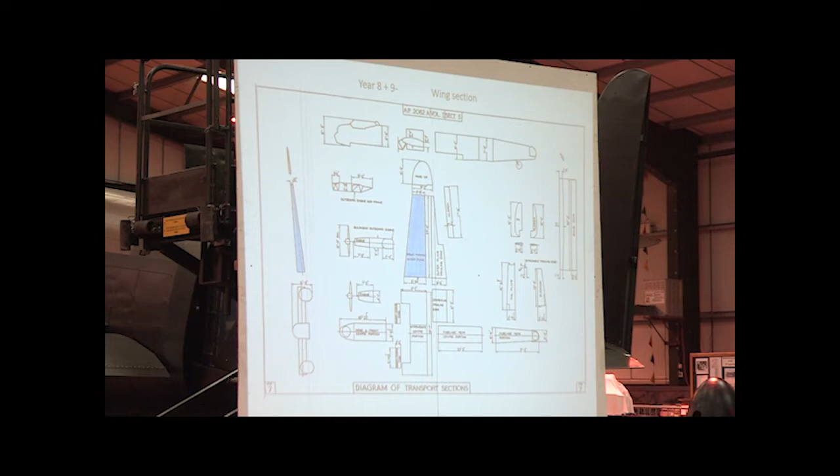So that's the next 2 years. So year 8 and 9 is the wing section. Then year 10 is the big one. It's the centre section. So if we do have to replace spars, this is a big part of it. The centre section is a very big piece.

If you look at the Lancaster, where the wing itself actually tips up, that's the start of the outer main plane where it joins the centre section, and the centre section comes just rear of the rear spar and just forward of the forward spar.

And that's why we've left the spar work till the end. People have said, why have you left the spar work to the end? Generally, when you restore an aircraft, you start with the heart of it and work outward, which on a Lancaster would be the main spars, and work out.

We're working to a 10-year plan, as you can see here. We don't know what's going to happen in year 10. You might find that insurance companies will no longer insure vintage aircraft. You might find the CAA turn around and say we're no longer going to allow aircraft of that period, that vintage, to fly. You may find that you can no longer get avgas, which is a possibility.

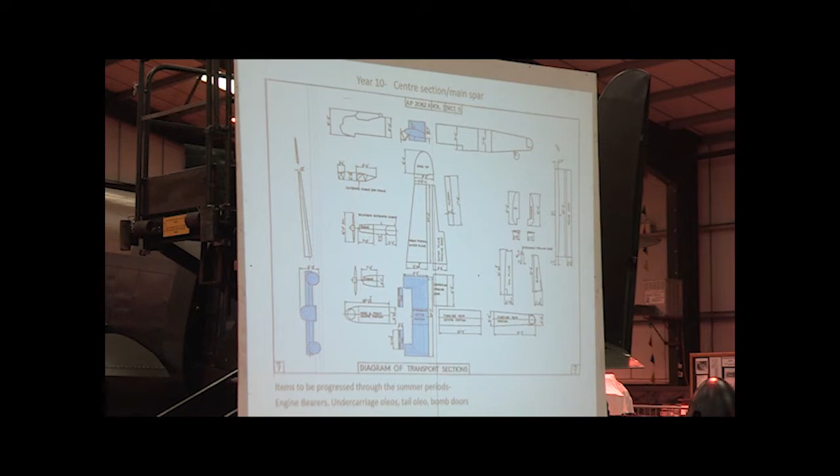So we are not going to possibly invest the huge bulk of money in replacing spars if in actual fact in year 10 we can't fly it. If there is any damage to the spars, they're still perfectly fine for taxiing, just not good for airworthy. So we're biding our time, spending what money we have replacing rivets and things which will fall apart in the end, before taking that big gulp, that big bite, and possibly looking at replacing spars.

So that's why the heart of the aircraft is the last bit to be done. What money we have, we want to spend on bettering the aircraft as a whole, rather than one section of it.

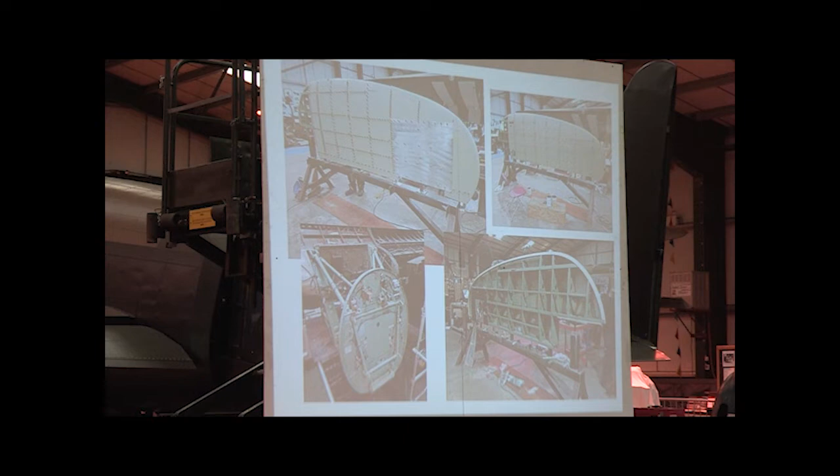If you lose enough of them, then the skin of the structure will actually start peeling away from the structure itself. So we've got a problem with mag alloy rivets - let's say there's about 1 million on a Lancaster supposedly.

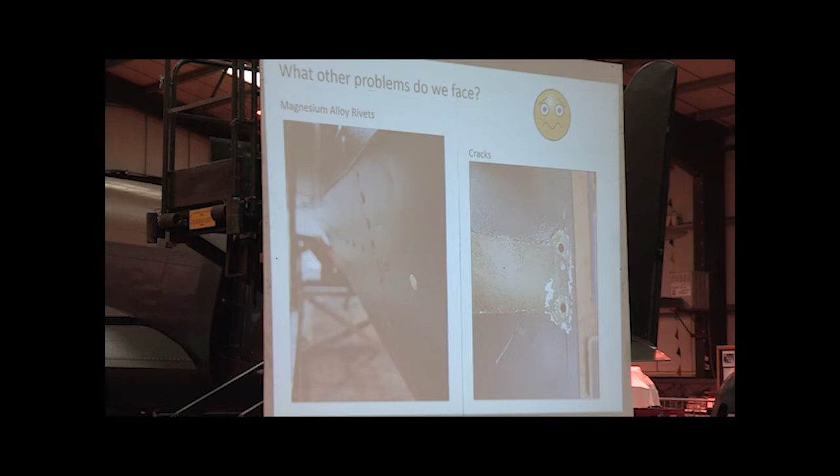We're encountering cracks, and we've found that on the tail fin there's quite a few cracks in areas where there's been high stress. You'll also find areas where strengthening pieces were put in due to the skins panting. Panting is where the skins move with the airflow over them, and it starts to pull rivets, crack skins, and damage the structure inside. We've found a few instances where a modification later on in the production line put in a reinforcing stringer, but the earlier version hasn't had it done.

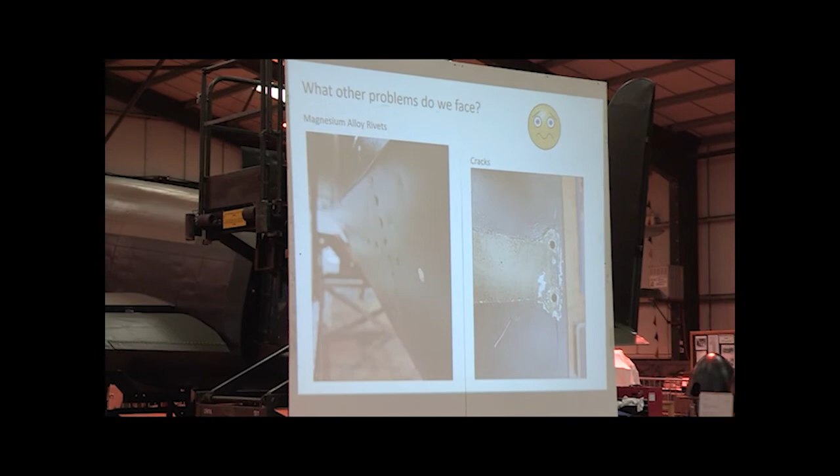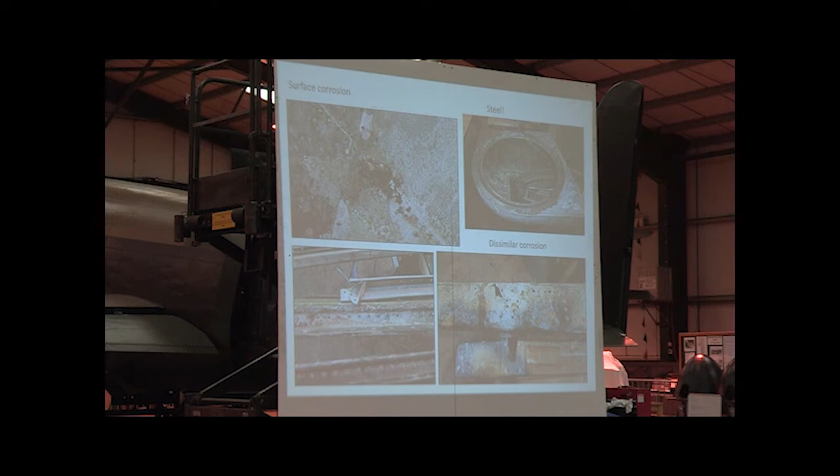We didn't find it until we actually took the aircraft apart because it's hidden behind the engine DA, the DA from the number 3 engine. DA is the cone that sits behind the engine and comes up and meets the wing. It's called DA because it looks like a duck's arse.

What we find as well is problems with steel. There's a few sections of steel on the aircraft - this here is the ring that retains the tail turret on NX611. That was found to be corroded when we took the turret out. So the front turret and the rear turret ring are both corroded and will need replacing. They're fine, they're holding the turret without a problem, but you cannot justify refitting that to an airworthy aircraft, so it'll have to be a new one stamped out.

One of the problems that's leading to the most work and the most bits having to be replaced is something called dissimilar corrosion. Dissimilar corrosion is what happens between two materials when they react with each other, and if there isn't a sufficient barrier between the two materials, they actually start attacking each other and eat through each other.

So this here is an aluminium extrusion on the port fin. One of the modifications to strengthen the extrusion was to fit a short piece of steel within the extrusion to add extra strength, stretching up about a third of the length. What's happened is the steel has corroded and in turn corroded the aluminium, eating away at it. So this extrusion is no longer satisfactory for airworthiness, and it's currently being replaced.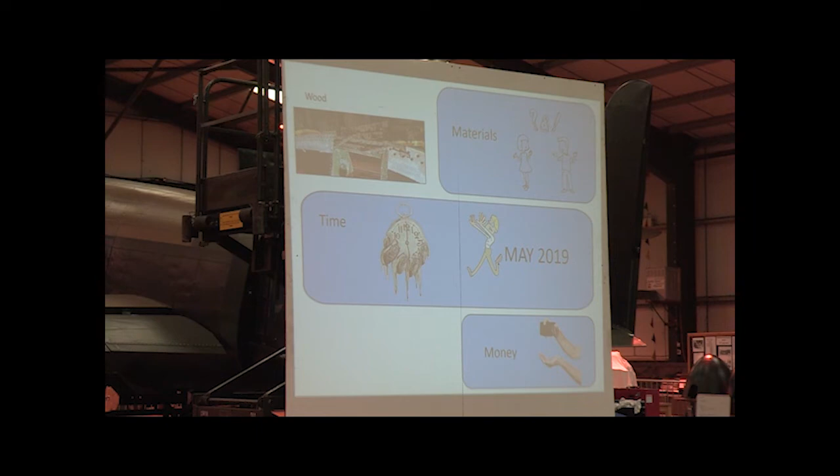So the way this project is funded is purely by people like your good selves coming, visiting the centre, paying your admission fee, and that money goes towards the restoration of the Lancaster and the operating of the centre. Every cup of tea you buy, every cake you buy, every book you buy in the shop, all goes towards funding this restoration. We can't simply stop taxiing the aircraft, take her apart and restore her, because we don't have the funds coming in to do that work.

And although during the winter period we have people like yourselves coming to this talk, people coming to the winter restoration tours that we do around the aircraft, people coming to see the work happen, it's a drop in the ocean in comparison to the amount of money that's spent each winter.

Each winter at the moment, or sorry, the last 3 winters, we've spent in the region of £140,000 net on the aircraft.

The whole budget or project expected cost for the Lancaster, because to a degree you can't have a budget when you're doing this, because there's so many things you're going to find as you go through that you just haven't factored for because you weren't expecting it. So the whole expected cost of this project is £3.5 million.

We've currently spent in the region of £1 million. We don't get any grants from anywhere, we don't get any tax relief, so we pay full tax on the fuel that we purchase, we pay full business tax, we pay full business rates.

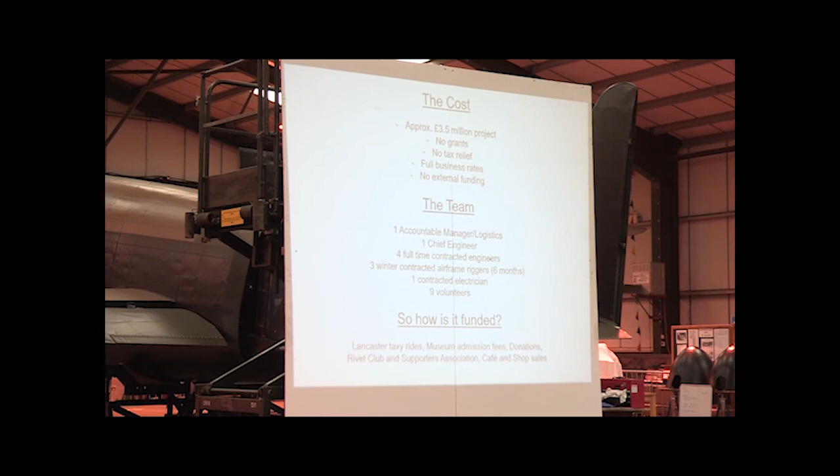So obviously the cost of this hangar is rated as if it's a storage hangar that we're renting out for people to store their goods in. So there's a huge amount of business rates on the museum, and there's nothing we can do about it really in that respect. We don't get any external funding, so it is all funded by the taxi rides and good people like yourself actually helping us along the way.

The team, so we have a team currently of about 19 people that are working on this Lancaster. There's the accountable manager for the CAA registered company, that's myself, and I also organise the logistics of all the work taking place. We have a chief engineer, who's the chief engineer on the A8-23 company.

He does about 3 days a week. We have 4 full-time engineers who work with us full-time throughout the year, so they're also working summer as well as winter. We have 3 contracted airframe riggers who help us for the 6 months over the winter period. So they're contractors. We tend to get the same contractors back, so they're familiar with the project. But they're contractors that will work for us for 6 months and then probably go and work for BA or Ryanair, and they'll be working on your civilian airliners that you fly on holiday on.

We have a contracted electrician who's actually here today, and we have 9 volunteers as well. Those volunteers range from somebody helping booking the stores in, to somebody cleaning corrosion, somebody doing electrics with Taff, the electrician. So there's a wide range of jobs that the volunteers are doing, and they're just that extra bit of manpower. They kind of make the difference between whether you can afford to do the job or whether you can't, because they're doing the jobs that we can't justify paying the high-priced engineers to do, basically.

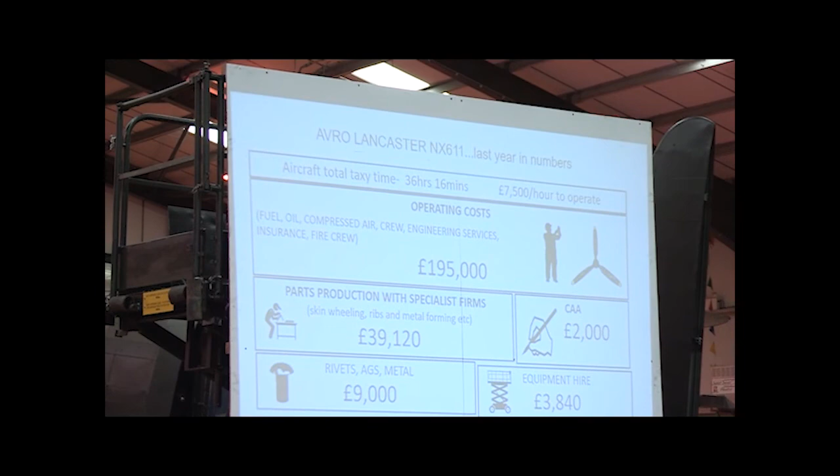So just to look at a year's operating of the Lancaster for doing taxi runs. This is the 2017-18 taxi run year. We taxied for a total time of 36.25 hours, and with the cost of the work with the aircraft, the operating of the aircraft, it works out at £7,500 an hour. That's net, so plus VAT.

And all these costs include the normal operating costs of the Lancaster, so everything we have to be able to taxi her, plus the restoration work we're doing to make her airworthy. So fuel, oil, compressed air, all operating costs, the engineering staff costs, the insurance: £195,000 a year.

So parts production with the specialist firms, that's all towards the restoration of the aircraft - the wheeling of the skins, the forming of new formers and ribs: £39,120. CAA costs, these are ramping up each year, and this year is going to be quite a lot more.

As we go through the writing of the exposition for the company and the meetings with the CAA to get the official stamp on the project - the CAA costs for that year were £2,000. That's more likely going to be closer to 7 or 8, I would imagine, this next year.

Rivets, AGS - so rivets, nuts, bolts, and metal, purchasing skin aluminium to be formed: £9,000. Equipment hire, so that's anything from heaters through to scissor lifts to crane hire: £3,840. Paint, cleaning and consumables, anything from masking tape through to paint, through to polythene sheeting, and those rubber discs we use for cleaning aluminium: £5,000. Then NDT and testing is about £8,000.

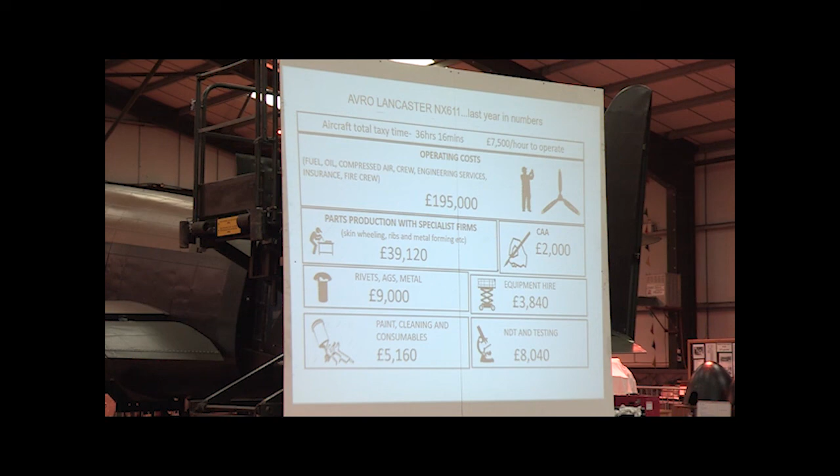Okay, so that kind of wraps up where we are with the restoration. Next year we're looking at the rear fuselage section of the aircraft being taken apart and restored to airworthy. It'll have to be completely paint stripped inside as well, which is going to be a huge job. We're looking at using probably dry ice for that, or soda blasting - we'll see which is most effective.

So looking forwards, you've seen what we're going to be doing each year, culminating in a 10 or 11 year project with a completely airworthy aircraft. What we don't know is, for one winter period we think it will take 6 or 7 months to do a job - it might actually take 2 winter periods, so that all of a sudden adds an extra year onto the expected restoration plan.

So I'm not going to say take this with a pinch of salt, but speak to me again in 3 years and see how we're doing. As I said, it'll take about 3.5 million we're expecting, other than the extra problems we might find.

And yeah, so next time somebody asks me, when's it going to fly? What's it take to fly? If you can just leave your names and addresses, I'll just refer them to you, and you can recite what you've heard today.